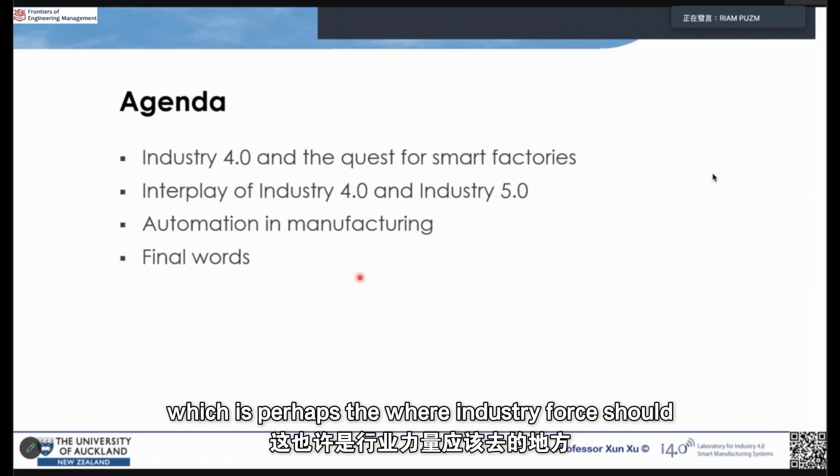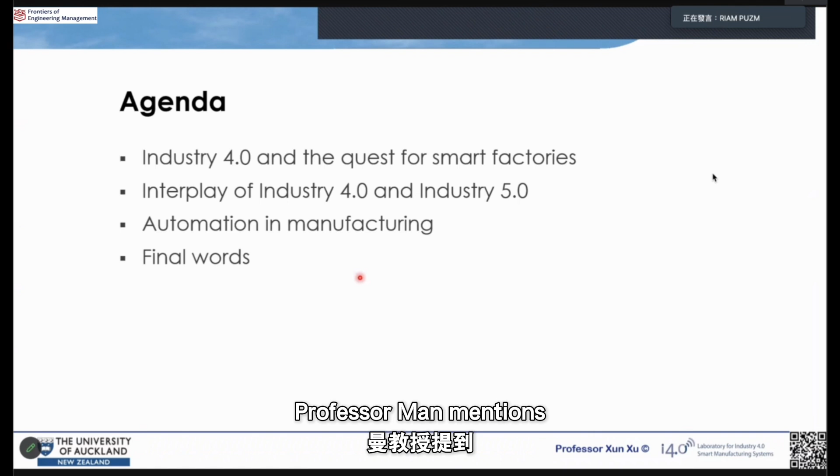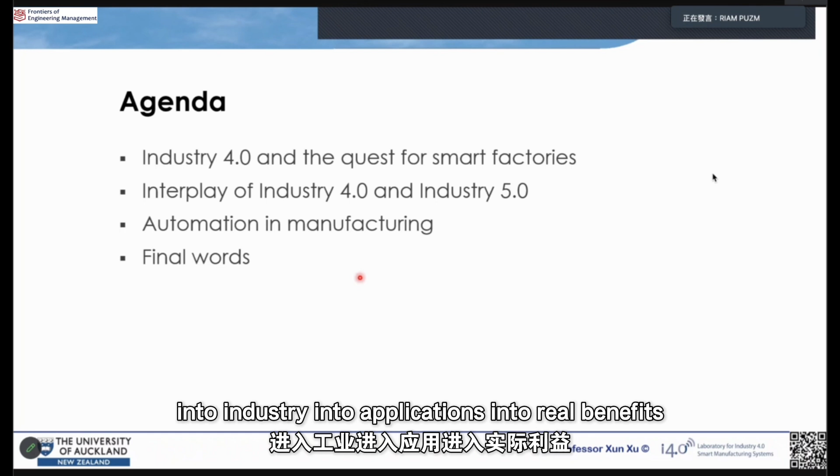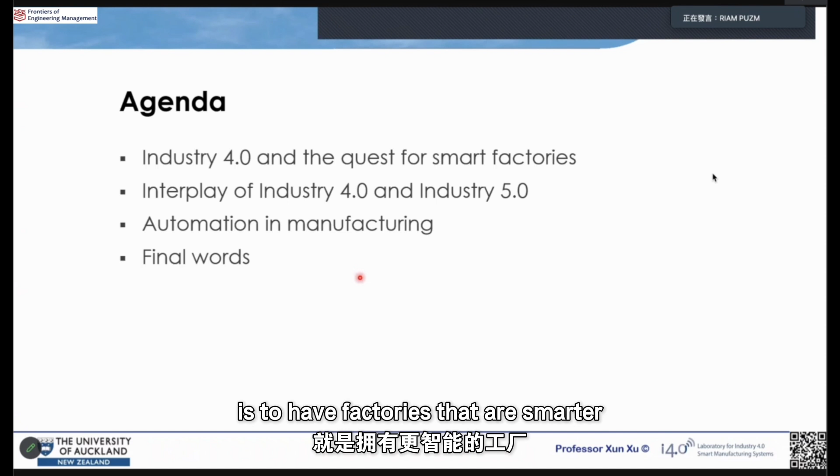So what I'll do is talk about Industry 4.0. I'm sure all of you are aware of this - it is perhaps a quest for smart factories, which is where Industry 4 should land or bring benefits and values to society in many ways. As Professor Mann mentions, when you do manufacturing research, you have to do it so it can be transformed into industry, into applications, into real benefits in industry. But how to do that? One of the things people think Industry 4 should see as an outcome of research is to have factories that are smarter.

I'll talk about Industry 4 and Industry 5, the interplay of these two industrial revolutions - a strange situation we're in right now, working on Industry 4 while we have Industry 5. So how do we position ourselves? I'll talk about that. Interplay is perhaps not the right word, but I couldn't find better words for it. We'll see how it goes.

And automation in manufacturing is the final topic, as you've seen in the title of my talk. Again, I don't mean automation in the conventional sense as in Industry 3.0, but automation in a broader sense - things that may operate and have autonomy without involving human beings in the processes. I'll finish off with a few final words.

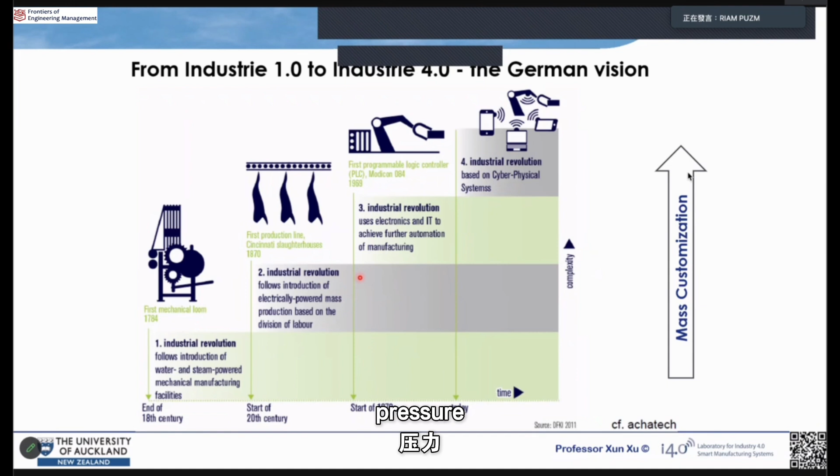Well, I guess the key thing is mass customization for manufacturers. The days are gone when you could produce cheaply the same products in tens of thousands of volumes and millions of parts - everything the same - to drive down the cost and make it affordable. But now things have changed, and people all want things to themselves - something that you have, but nobody else has. That puts a lot of pressure and creates a lot of challenges for manufacturers, who have to make sure they meet your requirements.

Their system, the factories will be able to produce a very small volume of products. One extreme is one-off and big varieties. And they have to have a quick turnaround, and even further, they have to make sure the cost doesn't go up too much. Otherwise, nobody will buy whatever you make. It's a huge challenge, and this requires factory to be smart.

That's why smart factory is perhaps one of the key outcomes of Industry 4.0, as we see the technologies bring value to industry. But what is a smart factory?

Industry 4.0 technologies will lead to smart factories. One of the things is really to achieve individualized consumer and product manufacturing purposes. And CPS is one of the key technologies. As you probably have seen, under Industry 4.0 CPS is highlighted as a key element.

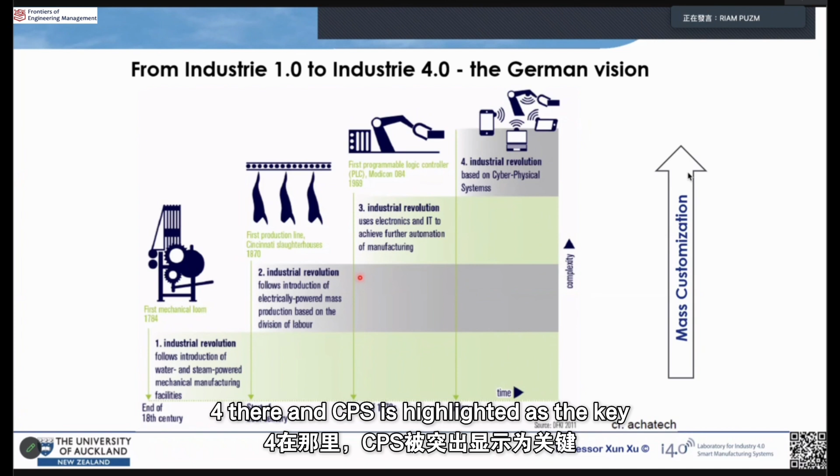The second thing is really you need to make manufacturing systems or factories broadly connected, so that you work as a coherent entity across the border, across different countries. And cloud manufacturing is one of the methods to make this happen.

Sustainability, we've all been talking about this, and it will only increase in terms of the work in this area. Service-oriented business practices - so manufacturing and services, usually they are sufficiently different, but now they converge. They share a lot of features and traits, and they will converge as we go in the years to come.

One of the technology shifts for smart factory is really looking at the components in the factory, how you actually control them. If you look at traditional factory, even if it is fully automated, things are normally centralized. So control is centralized, and the effort is to centralize things and integrate things, to coordinate things at a high level. But now we want to have a system that's flexible.

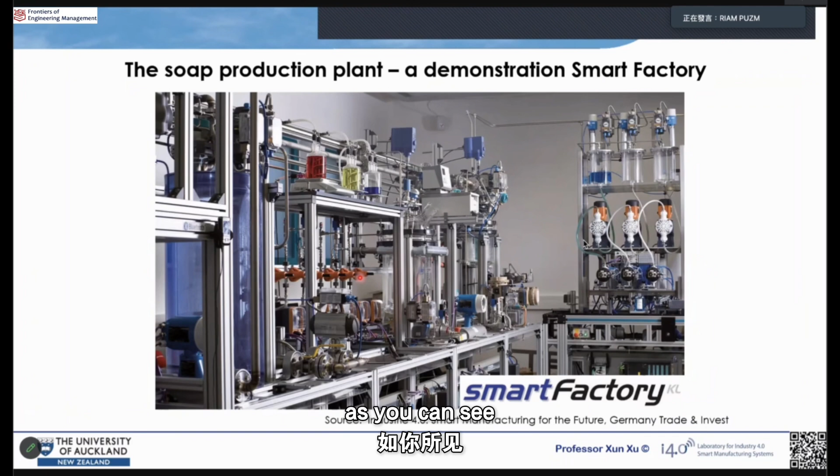When they're put together in whatever layout format, they know collectively what they can do. They require individual workstations to have the ability to connect, to communicate with other modules, and then collectively they can perform tasks, in a way they are set up in the layout.

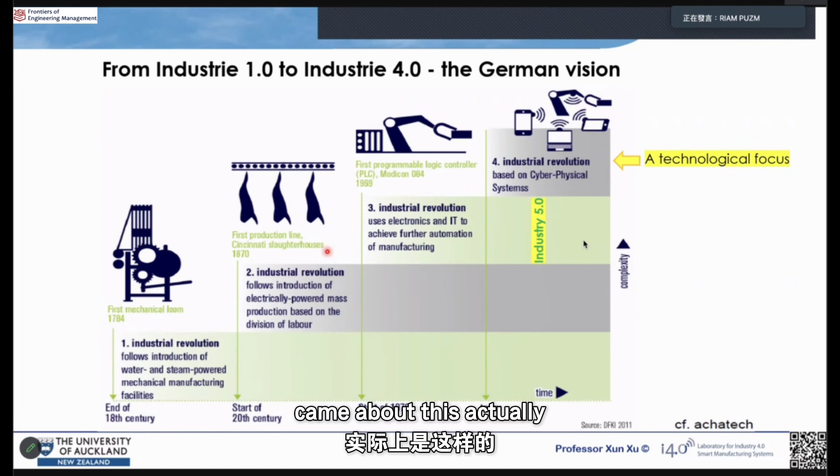And because of this, perhaps because of this - I'm pretty sure there are many other reasons - along comes Industry 5.0, sort of around 10 years after Industry 4.0 was introduced. So this is around 2021. Industry 4.0 was 2011, so about 10 years later, the idea, the concept of Industry 5.0 came about. This actually came from the European Commission. They announced funding proposals and themes around this topic.

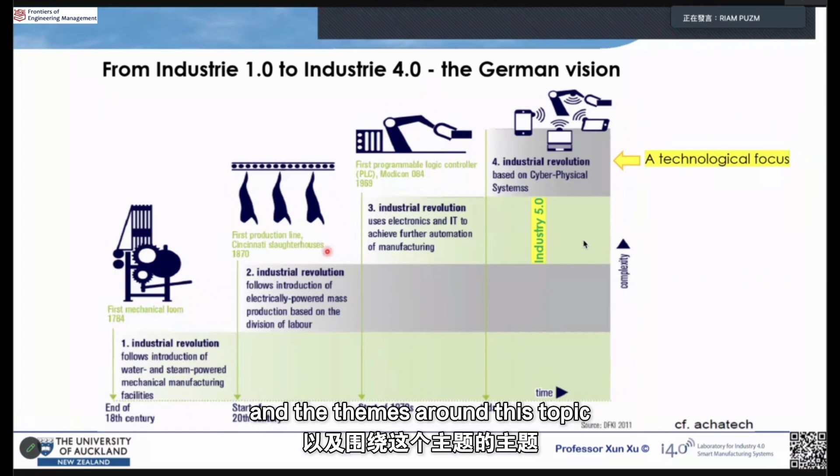And it's also around the same time we've seen the need for discussions and debates about two industrial revolutions happening. So we put together a paper - myself, Dr. Lu who is sitting here, Professor Lihui Wang, who you probably know, and Birgit Vogel-Heuser from Technical University of Munich.

Oh, right, that's right. Okay, thank you.

But I think what's important is what's covered in the paper. The paper is open access, so it's free - anybody can download and read it. And because of that, it has actually received a lot of attention. So what I've done is gone to the journal websites and tried to list the papers under different criteria.

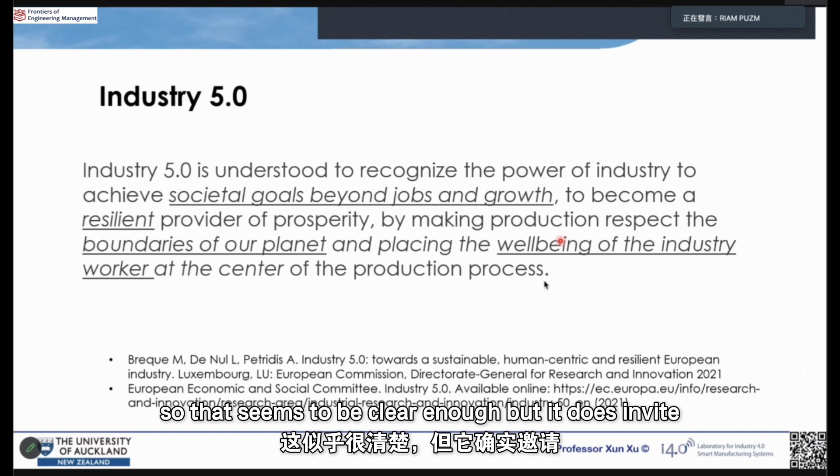I'll go through some of the questions as well. Before I do that - the paper highlights 3 pillars of Industry 5.0. There's a human-centric feature there, as I mentioned, which has got to be in the center. There's resilience and sustainability, respecting the boundaries of our planet. So that's Industry 5.0.

Now we have 2 industrial revolutions. Industry 4 is perceived as technology driven, and Industry 5 is perceived as value driven. But they coexist, and people may have questions - and people do have questions. We had questions as well as we were writing that paper. What are the questions? The questions were laid out at the beginning of the paper, and we have some discussions at the end. We attempted to provide answers to some of these questions, and I don't think the answers, by any stretch of imagination, are complete and final. So really it is a starting point for discussions - hence the workshop today. The workshop is a venue for sharing ideas, for debating topics, and looking into the future. A very fitting arena for us for this topic.

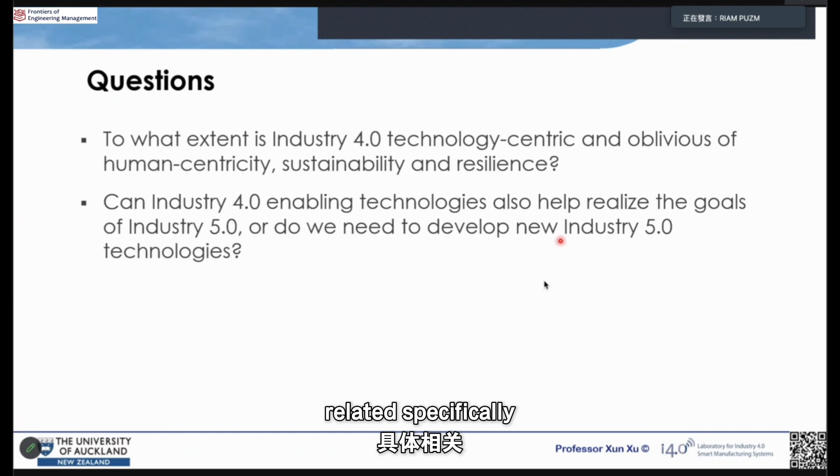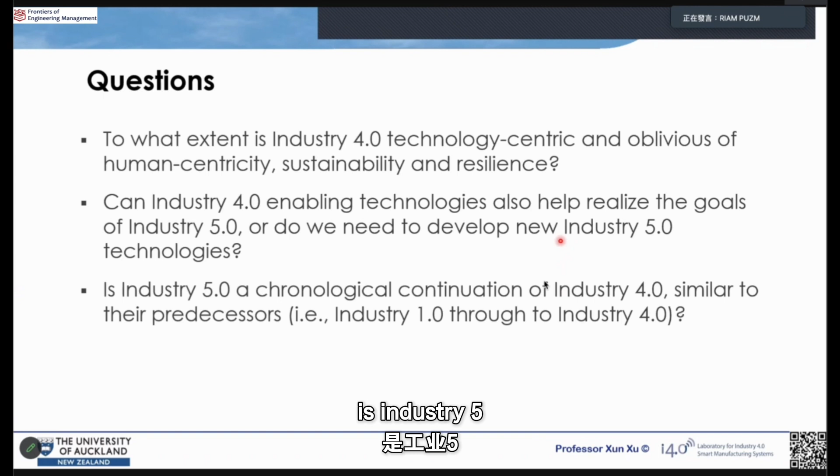Question number 3: is Industry 5.0 a chronological continuation of Industry 4, one after the other, just like the previous ones, Industry 1.0, 2.0, 3.0, and 4.0? Is Industry 5.0 similar to all the predecessors?

Question number 4: are we living amongst 2 industrial revolutions, or perhaps 1? It's only 10 years between these 2 terms being introduced. So I'll finish with this final question in my talk as well.

So very briefly, I'll just go through these questions and the attempts we've made to try to answer, respond to these questions. Question number 1: for Industry 4, yes, it does have a very clear technology slant. There's no question about that.

We've been talking about different technologies, CPS, digital twins, and IoT. But I think it is also fair to say it is not oblivious of human centricity, sustainability, and resilience, which means it does address that, it does mention that. If you look at the document published from Germany, it mentions these different aspects.

Perhaps not the central focus of Industry 4, but it does mention that, does cover that. Well, we seem to agree that Industry 5 is a shift in focus, from individual technologies to a systematic approach.

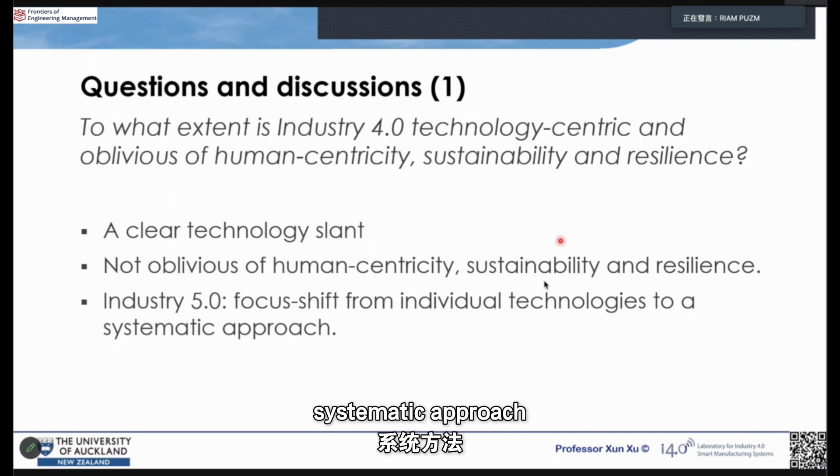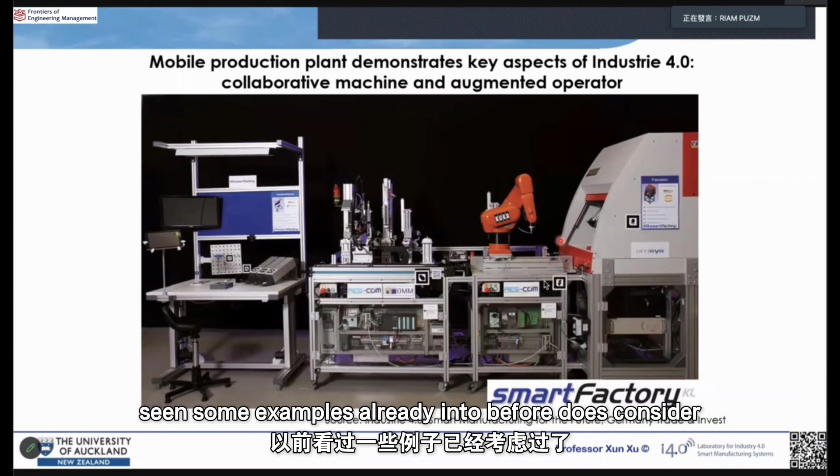So I think we've seen some examples already. Industry 4 does consider the human aspect. Okay, question number 2.

Technologies: Industry 4 technologies and Industry 5, do they actually have distinctive sets of technologies? Are they sufficiently different so that they can be differentiated among themselves?

But there are many ways of looking at it. You can have a look at the Industry 4 technologies. One of the lists people tend to quote is the 9 enabling technologies by Boston Consulting Group, though I don't have a slide for that. Some of you perhaps are aware of these 9 technologies. For Industry 5, the European Commission has identified 6 enabling technologies. But if you look at these lists and technologies, they actually have a lot of overlap, so they're not that different in many ways.

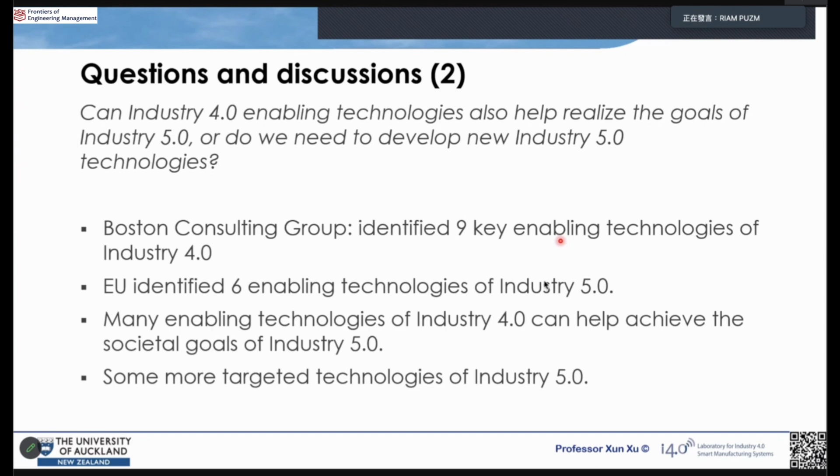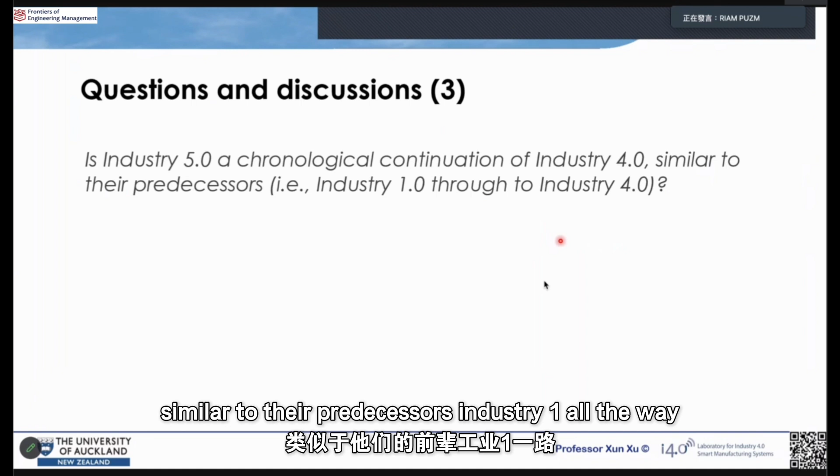Question number 3, perhaps one of the more obvious questions, easy to get an answer to: is Industry 5.0 a chronological continuation of Industry 4, similar to their predecessors, Industry 1 all the way to Industry 4? I guess the answer is no.

I don't think we have Industry 5 because we have realized Industry 4, so we move on to Industry 5. I don't think that's the situation. I don't think we can realize Industry 4 in a space of 10 years. I don't know how many years it will take to really transform the factory environment, to have all the technologies we've developed and you have been developing, seen on the factory floor.

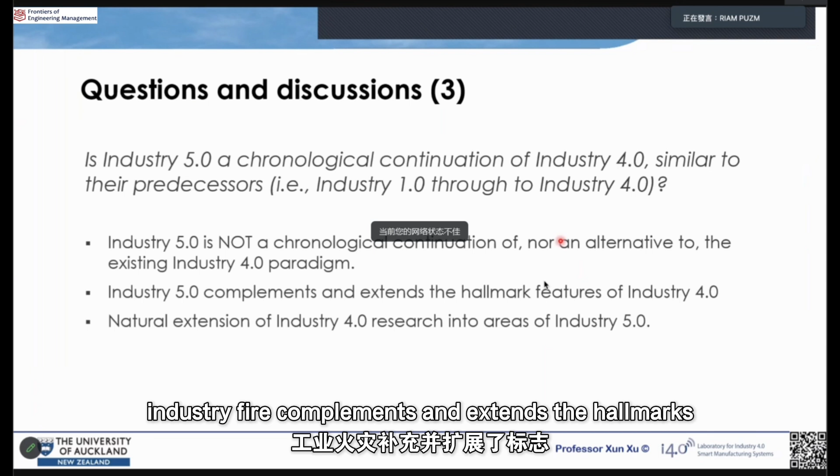Industry 5 complements and extends the hallmarks of Industry 4. I think that's true, so it's perhaps an extension of Industry 4, if you like, rather than yet another industrial revolution.

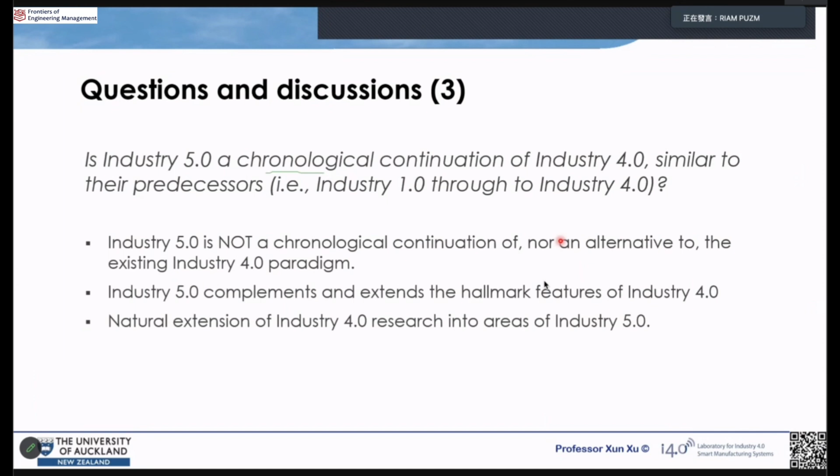Final question: are we living amongst two industrial revolutions, or effectively one? I call that a techno-social revolution. I like to think it's just one revolution. We started thinking about advanced technologies, and then we realized, look, we have to look after people in the factory.

We might have people in the factory for many, many years to come. How do we make a factory so that the workers and the machines come together, work together happily, and can be made very productive?

They form a coherent little society in a factory, so that's what I'm trying to put through to you. There's no point creating new terms like Industry 4, Industry 5. I read somewhere somebody proposed Industry 6.0, and others proposing Industry 4.5, Industry 5.5, whatever. But there's no point doing that. It might be useful to apply for funding using these new terms, but we're doing real research work, so I don't think that's the way we should go.

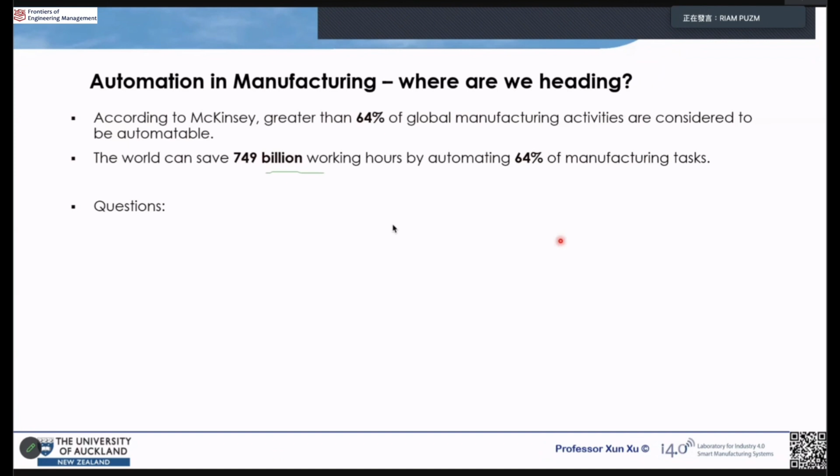But there are questions. Now we come back to my topic at the beginning, automate or not automate, okay? The first question is perhaps, will the trend of increased automation in industry continue in the future, until we have factories that run on their own, lights-out factories?

Just like cars we're driving these days, we'll have driverless cars in the future. I think that's coming, and we're going to see that. But factory, are we going to have people-less factories?

Suppose McKinsey does another study of this 20 years later, are we going to see different assessments again? Are we going to see maybe 85% of the jobs will be transformed, will be automated, or maybe 90%? Are we going to see that? This is a trend we need to ask ourselves, about the time that we may not be around, 50, 100 years later. Will we always see people in factories?

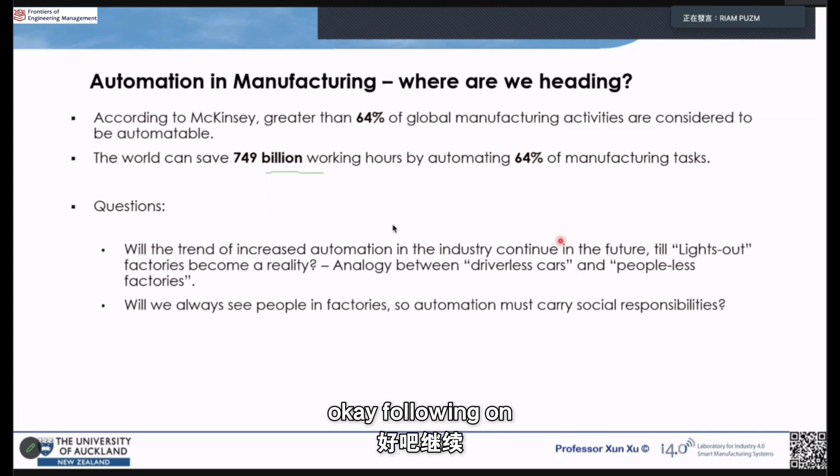Okay, following on to the first question, automation must carry societal responsibilities. If a factory has people, and they have to have people in the factory doing the tasks we need them to do, then the factory becomes a mixture of machines and people. It's like a little society, and how do we respect humans in the factory? I think that's one of the key reasons why we are talking about Industry 5.0.

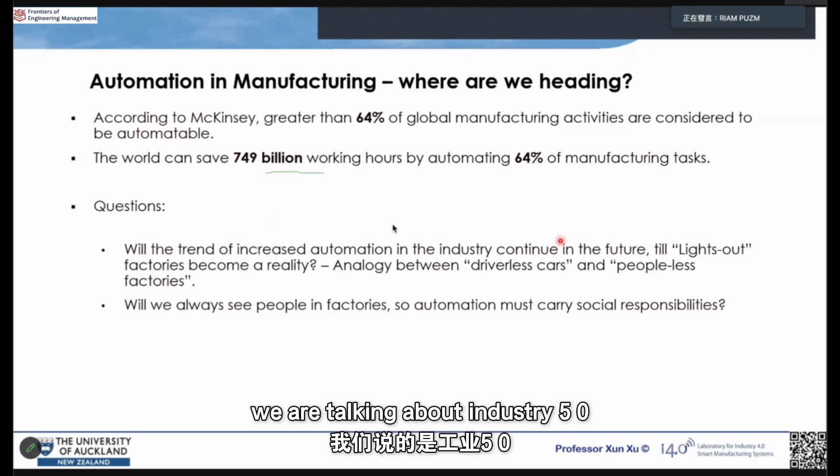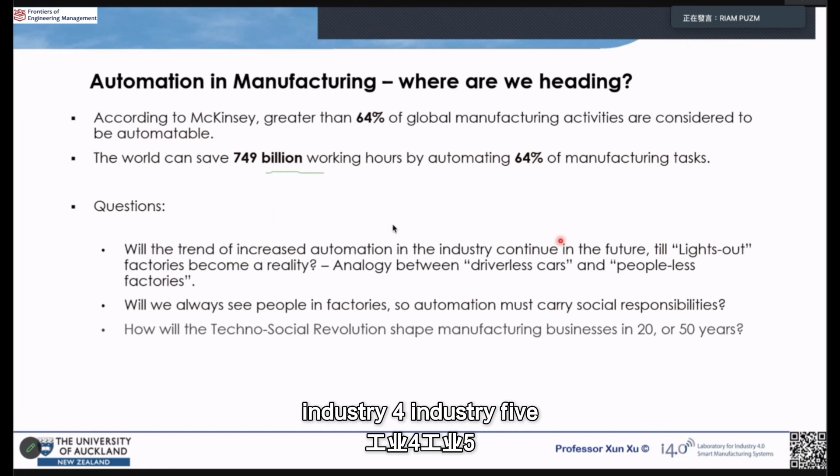That's the second question. Question number 3: how will the techno-social revolution shape manufacturing industry businesses in 20, 50 years' time? We talk about Industry 3, Industry 4, Industry 5. In 20, 30, 40, 50 years' time, how do we see that? Where does it go? Will manufacturing firms continue to exist as an economic entity or a social entity?

Factories, different manufacturers, over the years - one of the key drivers for a factory to exist, to continue to advance, to improve, is making profits. No question about that. You have to make things cheap enough that it can survive and be competitive.

But if we have people in a factory, do we need to consider them? If the answer is yes, to what extent do we consider that? So that's decisions we make, technologies we invest in, will benefit people in the factory, workers in the factory. You may compromise the revenue, the profit, but we may accept it because of this human-centric approach we're taking.

How does AI impact manufacturing automation? This is the time AI is blooming - the technologies, research on AI, in many years past, people didn't see much in mainstream application. Now is the time we see that. Like it or not, you see it, and we're jumping on that in different volumes and capacity.

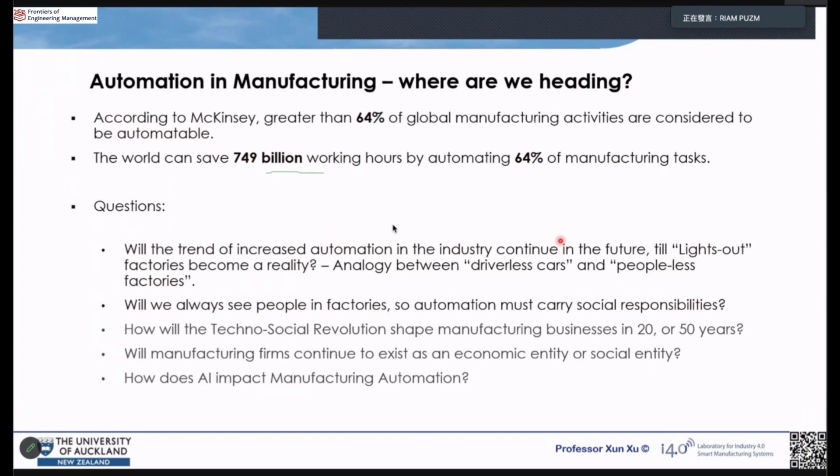But how does it impact manufacturing? Where do we see manufacturing go with the continuous influx of AI tools and open AI tools coming online? I want to come back to Industry 4, Industry 5, with human in the loop or not, and things that can be automated and things that cannot be automated.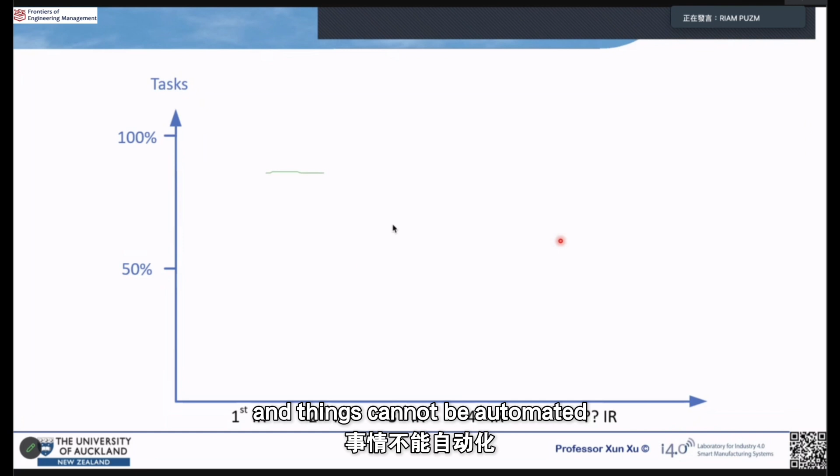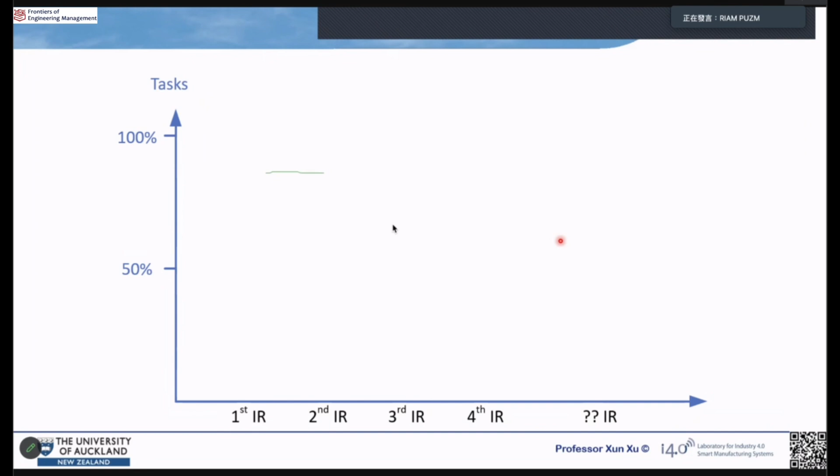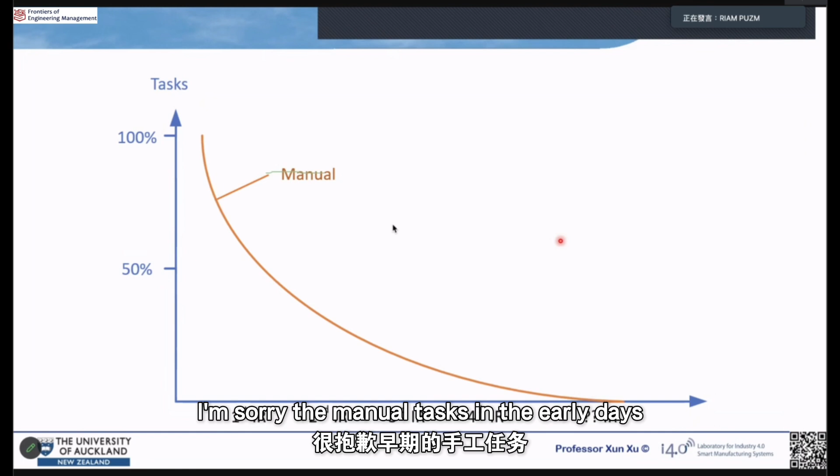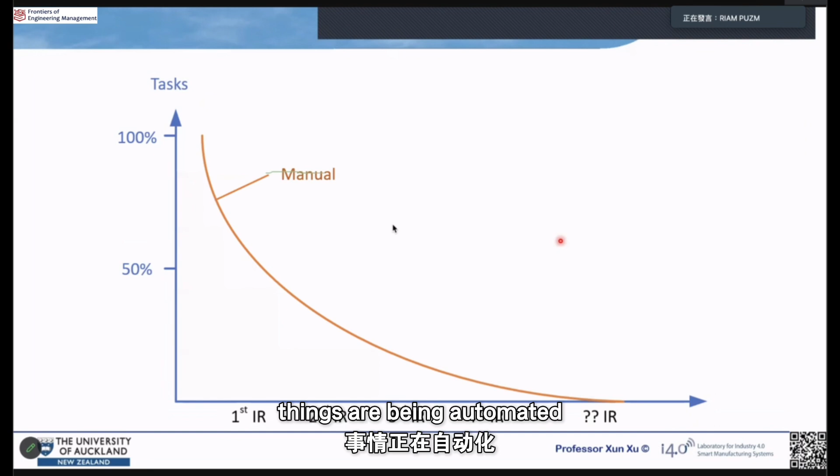So if you look at this chart, the vertical axis represents tasks in the factory, and I have industry revolutions on the horizontal axis. For Industry 4, perhaps the manual tasks in the early days, before the first industrial revolution, were all done by human hands. There were no machines. But over time, as we've had industrial revolutions up till now, things are being automated, so more and more jobs and tasks are automated. Hence the graph I've got there.

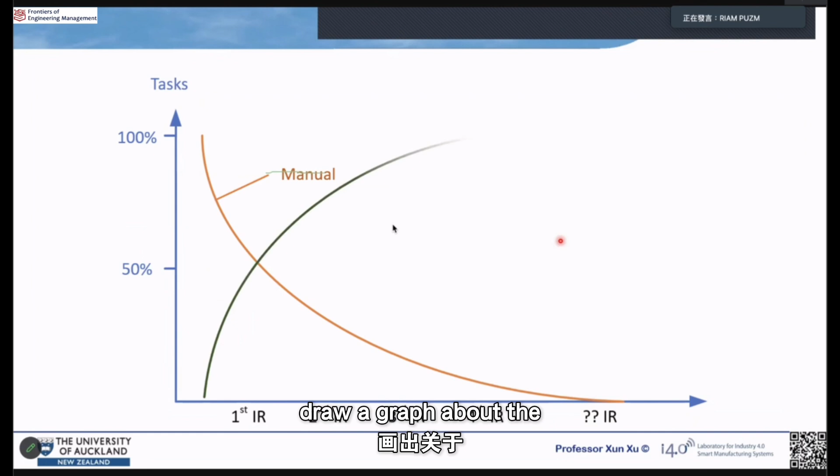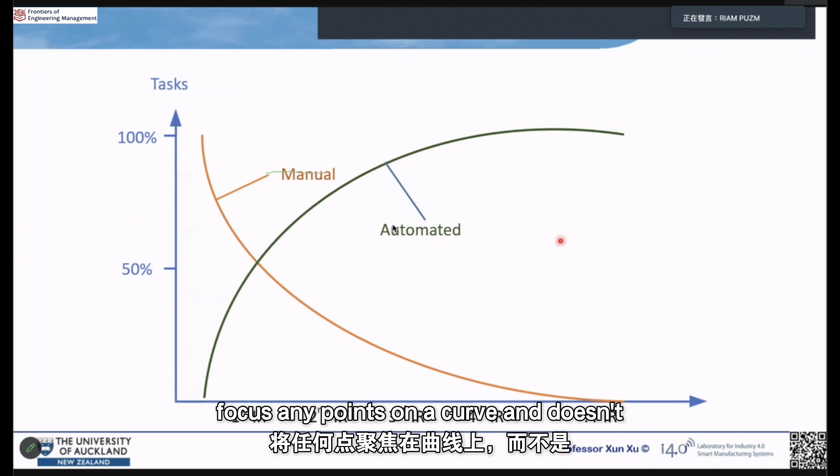But if you draw a graph about tasks done by machines, automated, it's just a mirror. This is a very indicative diagram, so don't try to focus on any points on the curve, it doesn't mean much. It's sort of a mirrored diagram, it's got to be mirrored, I think.

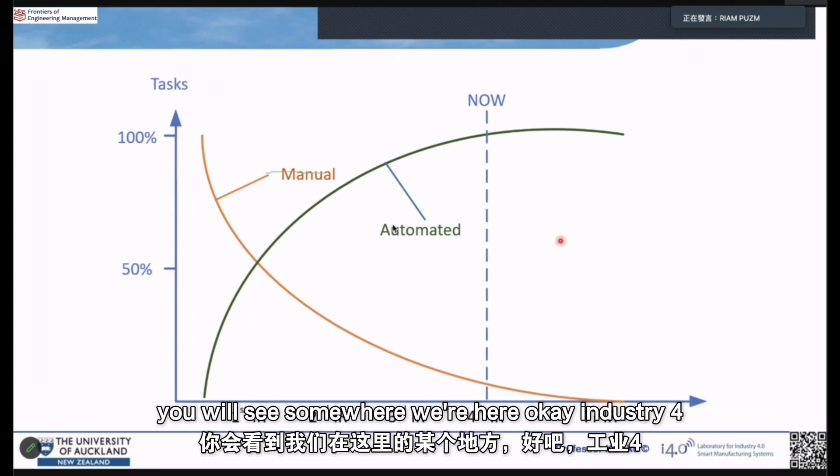So the tasks that are automated increase over time. Where are we at the moment? If you look at the factory, how many jobs are automated and how many are not? Probably we're somewhere here, at Industry 4, fourth industrial revolution.

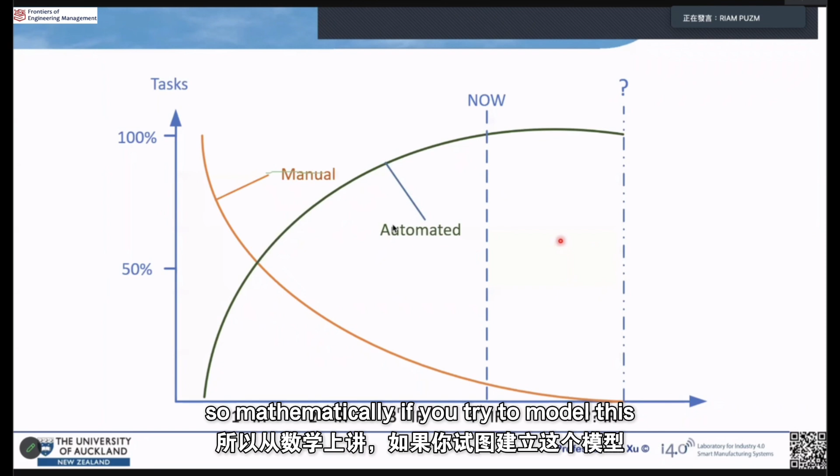But the question is, remember I was talking about the trends in the future. Will the trends of automation for manufacturing continue? It may slow down, but the trend still continues. It may take a long time to automate some of the tasks where we still have human beings involved. And will we ever see a day where factories actually run on their own, with no people in the factory? Mathematically, if you try to model this, you might have a point here, but this is perhaps, I don't know, could be next to infinite. Maybe we will not see that.

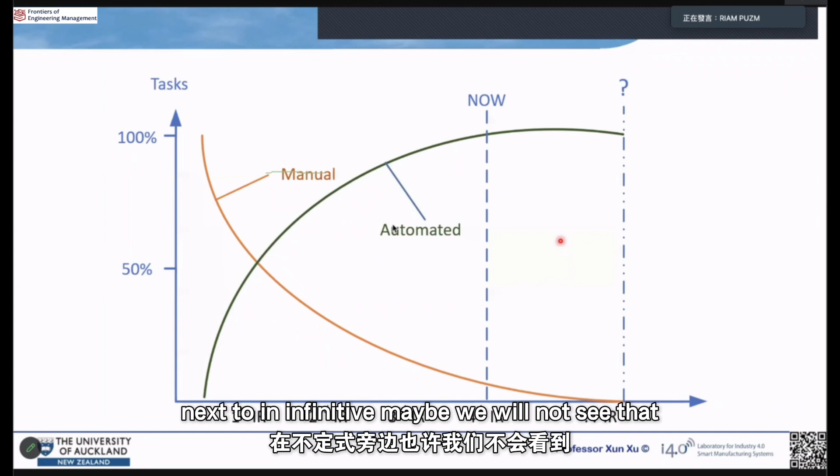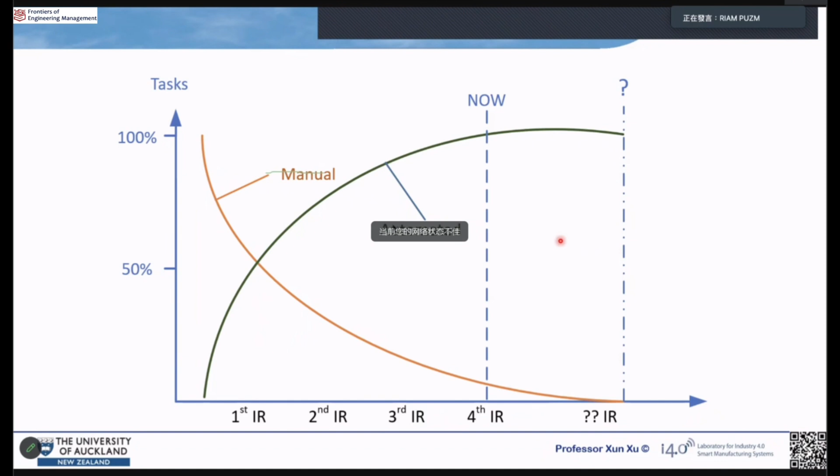But again, I'm asking questions. This is a question perhaps nobody can give you an answer to, so I wouldn't have the answer. I don't know, this industrial revolution, maybe there's a 10th industrial revolution we'll see, or something like that.

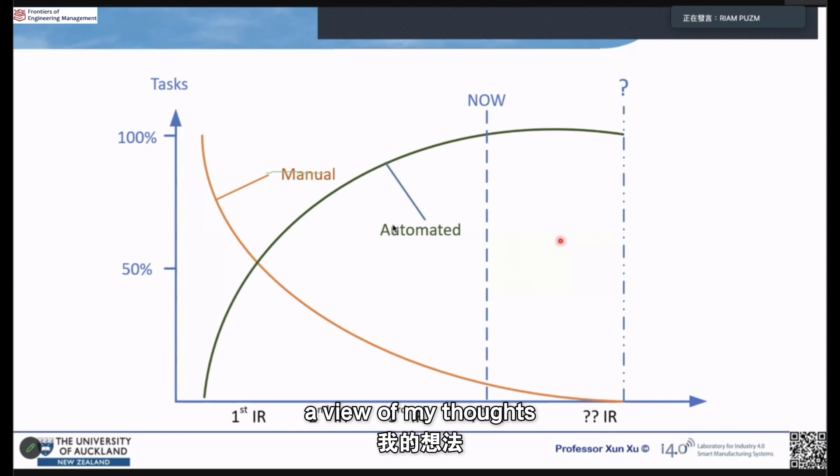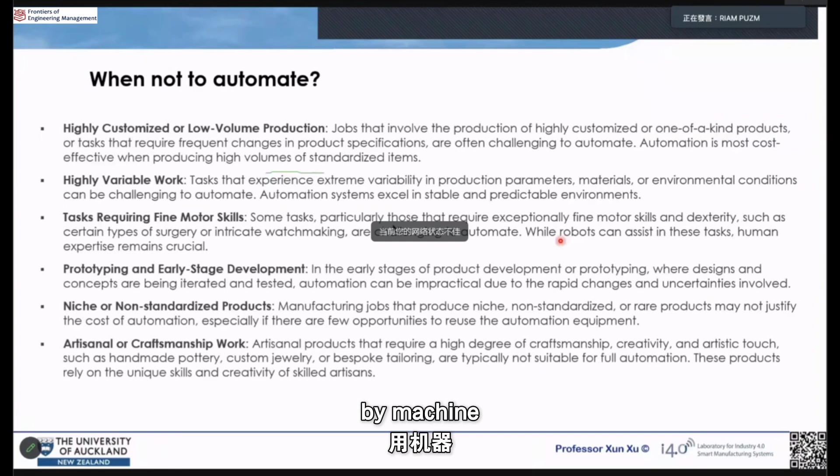So that's a graphical view of my thoughts on what to automate and what not to automate. In a factory environment, managers will have to make decisions, and the decisions are based on some criteria here - things need to be automated and things not to be automated. These are some of the tasks. Right now, people think it's better not to be done by machine - let's keep people there doing all those tasks. I won't go into the list, but they're all very self-explanatory.

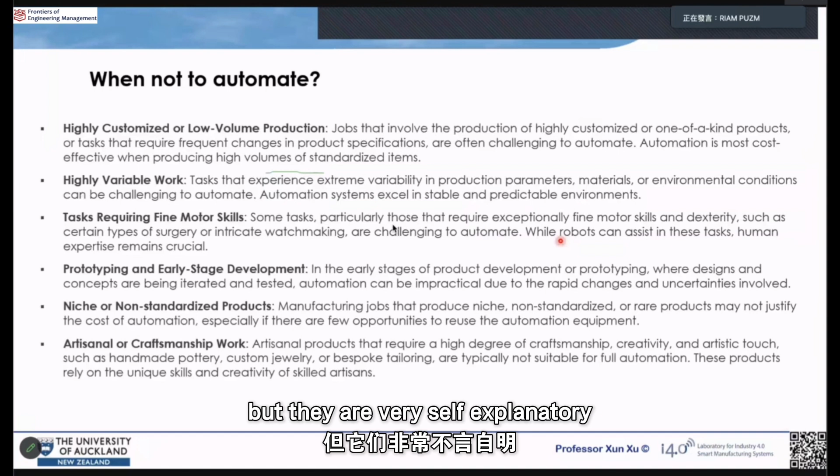I didn't mention AI for manufacturing. Well, that's coming, like it or not, it's coming. It's really in front of your eyes, and you see that day in and day out. Deloitte did a survey, and 93% of companies believe that AI will have a pivotal role to play in technology shift, growth, and innovation.

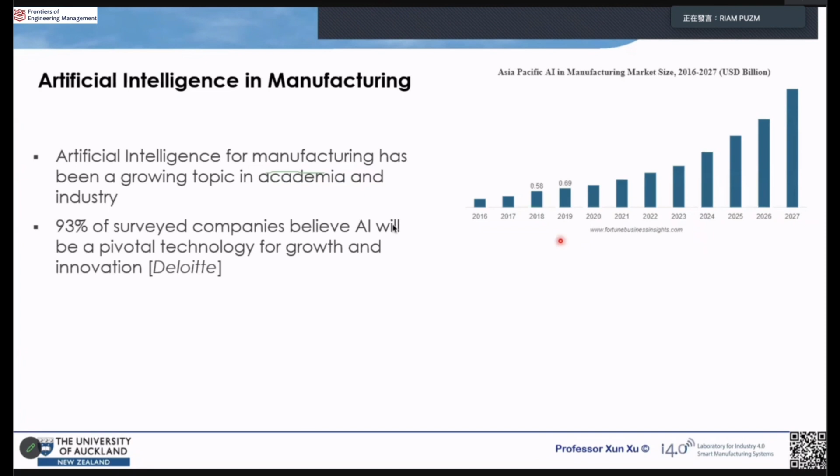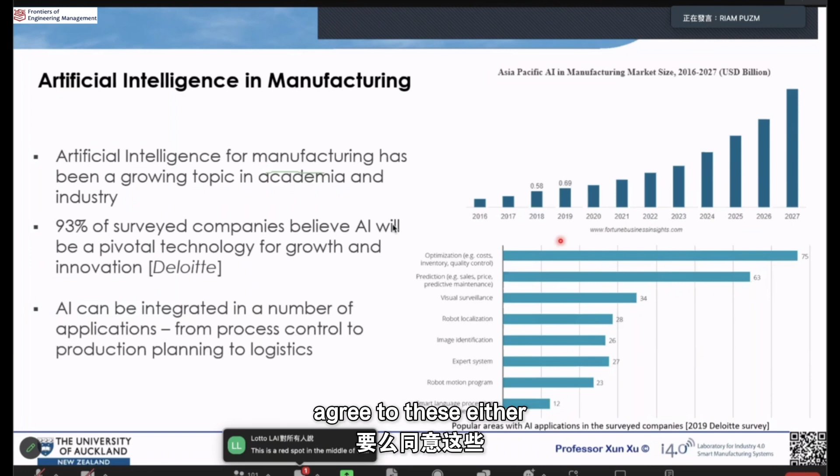So it is a general understanding, not difficult to agree to these either. Well, human-centric, human-robot collaboration - you've seen this in many places. An example from the Volkswagen factory in Germany, where a robot is working with humans doing assembly work and other tasks. So really, you can see the slogan here is: no knowledge left behind.

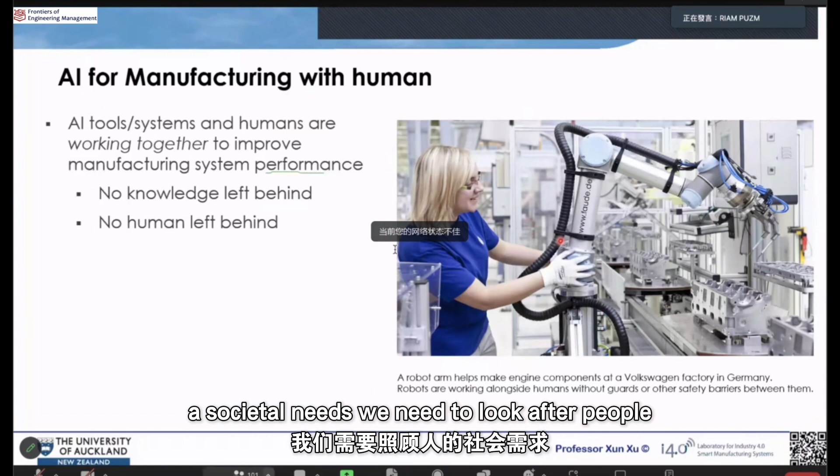So it's knowledge possessed by human workers and operators, and we want to preserve them, we want to make use of them. So knowledge is power, it creates value as well. No human left behind - that's really a societal need. We need to look after people, we need to take factory workers along with technology advancements.

Creating manufacturing systems with enhanced personalized production is one of the drivers of Industry 4. But really, if you want to make a system flexible and robust, and if you have a human in the system, then you need AI tools to give you the power and ability to make that happen, making manufacturing systems adaptable to system disturbance as well.

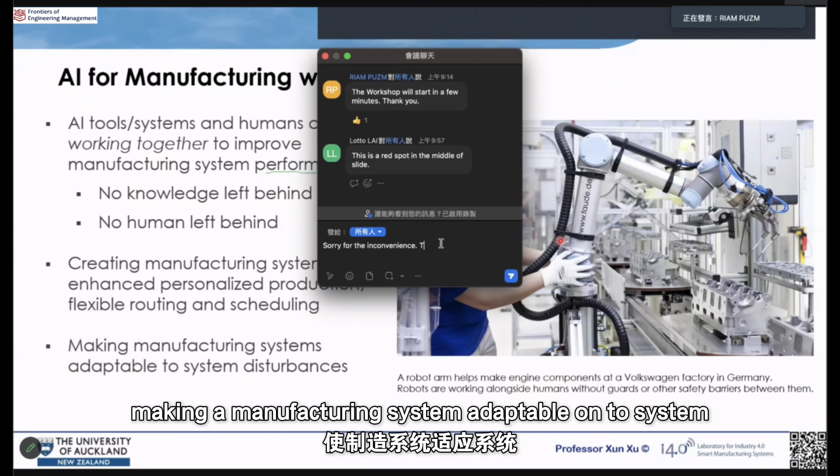So another question: what is a factory for? Why do we need a factory these days? It might seem a simple question, but perhaps you'll realize it's not when you consider two scenarios. One is a fully automated factory with no workers, and the other has humans in the system working with machines. So the question is: is a factory for economic benefits, or for social benefits? You might want to redefine benefits, but really it comes down to one without humans, one with humans. So how do you really treat the factory as a unit?

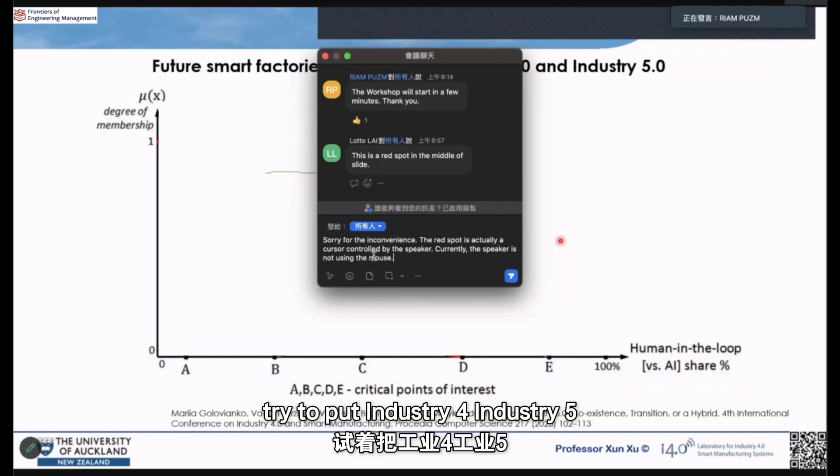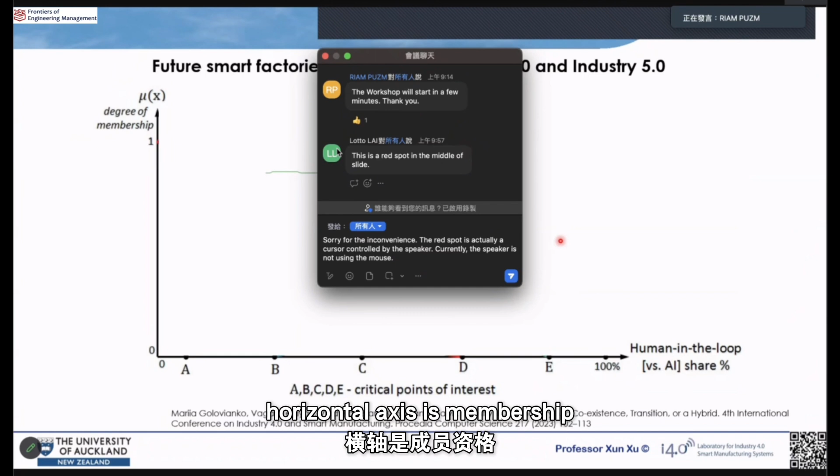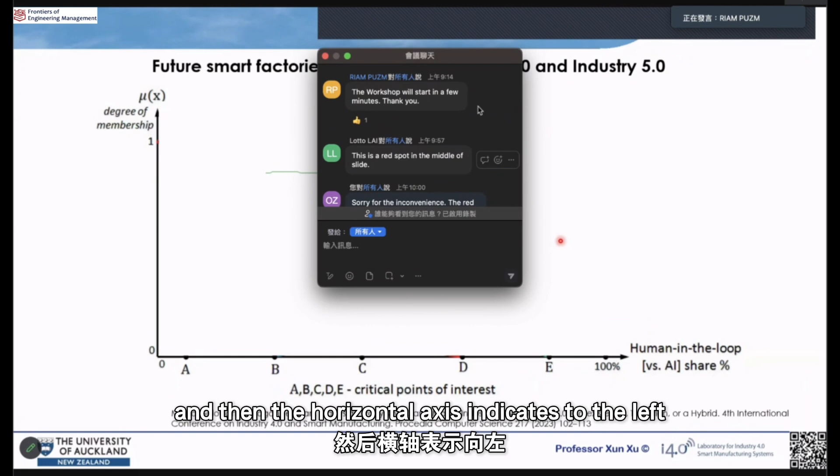As I was thinking about this, I came across a paper published last year from this conference, in Procedia Computer Science. It tried to put Industry 4 and Industry 5 in a diagram. I'm quoting this diagram from the paper. The vertical axis is membership, based on fuzzy logic - to what extent something belongs to a certain class. To the left is everything fully automated, and to the right extreme is everything done by human workers.

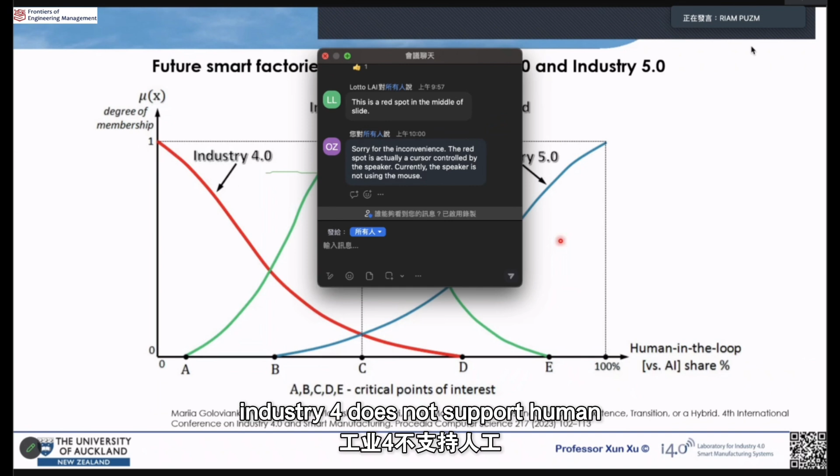The red line indicates Industry 4, so to the left is everything automated. At point D, this is where Industry 4 does not support human-in-the-loop, a human-centric approach. The blue line indicates Industry 5 - one extreme is 100%, where membership goes to 100% people if you go further right. So when you have both industrial revolutions, Industry 4 and 5, a hybrid situation, you get this green bell curve in the middle.

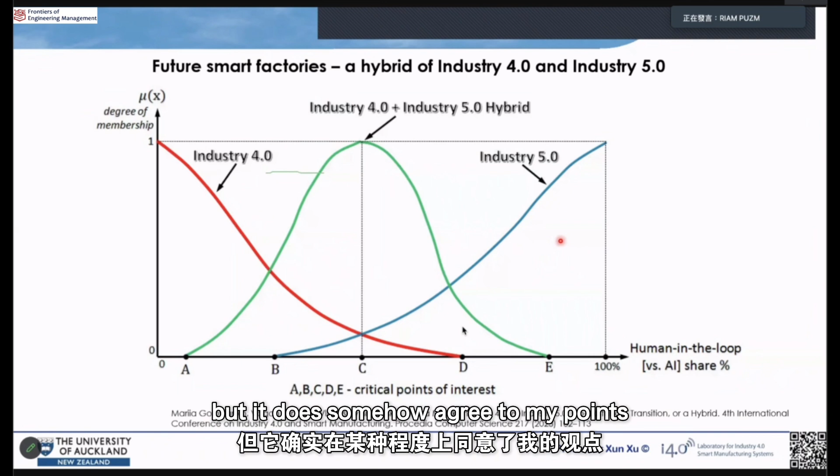This is perceived as where we are at the moment. But the paper falls short of calling this a single industrial revolution, as I like to think it is. It does somehow agree with my points though - we don't have two industrial revolutions, we only have one, where the focus has shifted somewhat.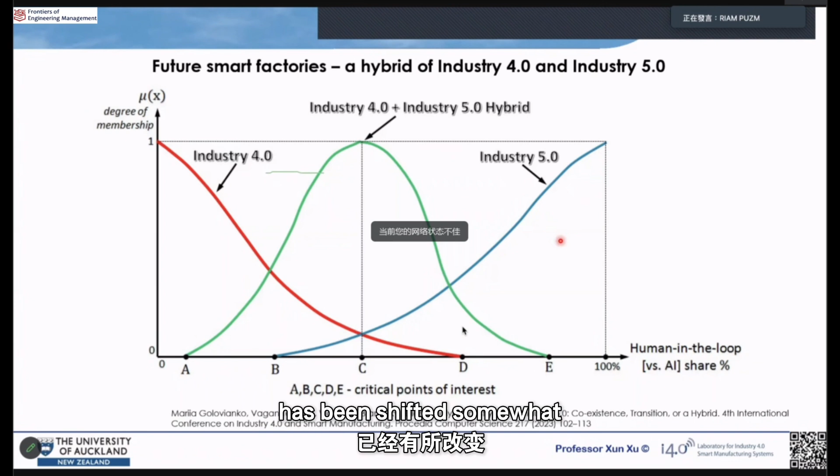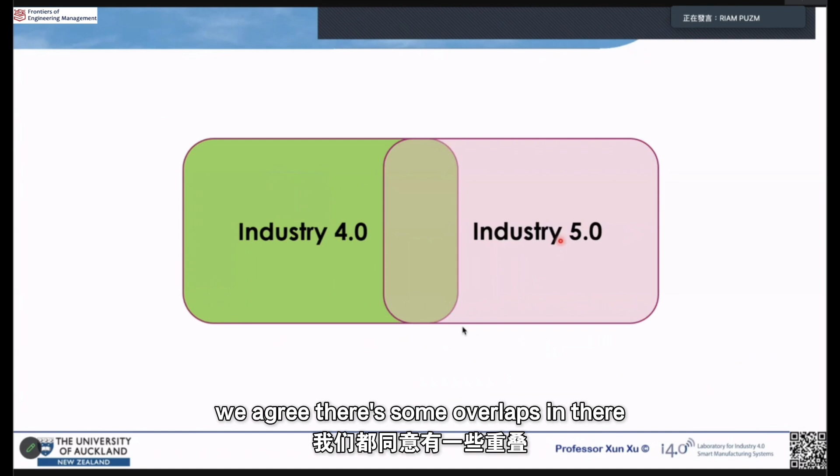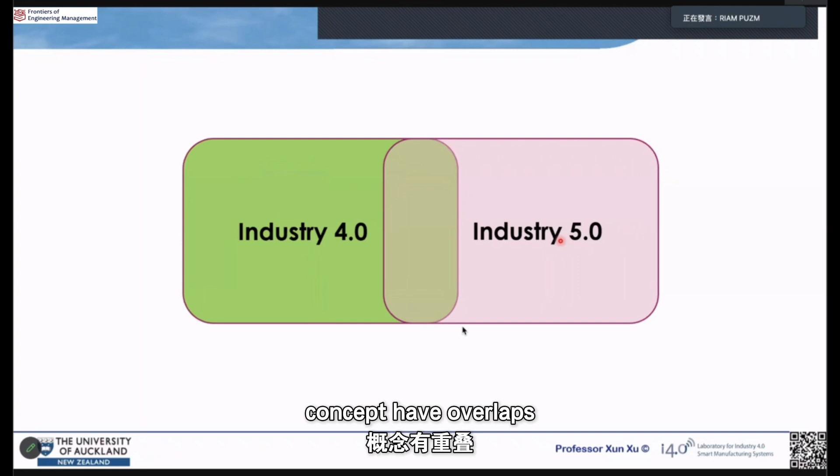Okay, here's another diagram - my own. If Industry 4 is what we think it is, and Industry 5 is what I think it is, we agree there are some overlaps. The overlap space doesn't really indicate the percentage of overlap, but I'm saying these two concepts overlap. Really, they have to be seen as one thing. That's why I come back to one term: techno-social revolution. Maybe there's another paper in the making to talk about this further - so we'll see, watch this space.

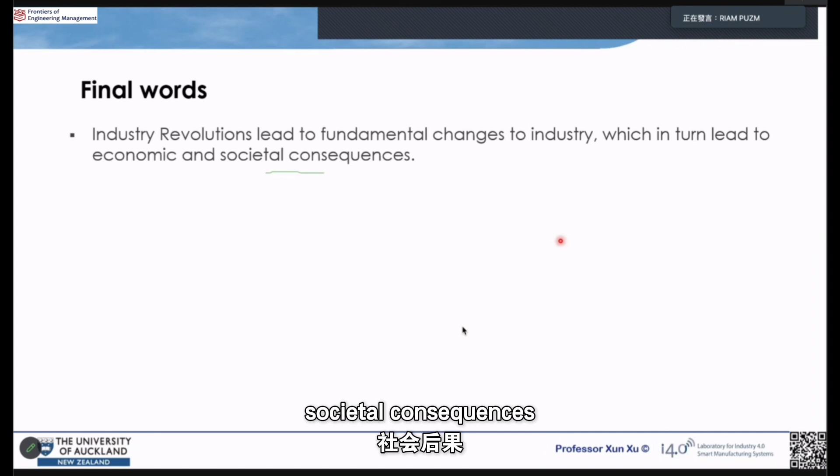To finish off, a few concluding remarks. Industry revolutions from 1 to 5, I think we all agree, have led to fundamental changes to industry, which in turn lead to changes in economic and societal consequences. It's very important to emphasize societal consequences, which weren't really there from Industry 1 all the way to Industry 3, I think.

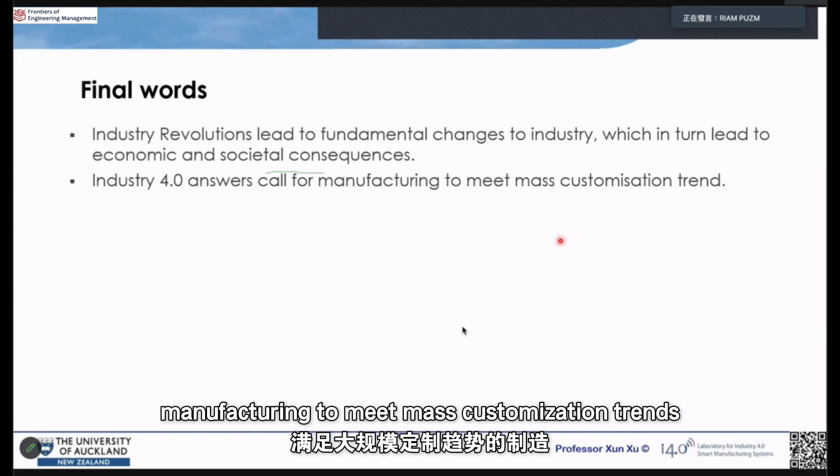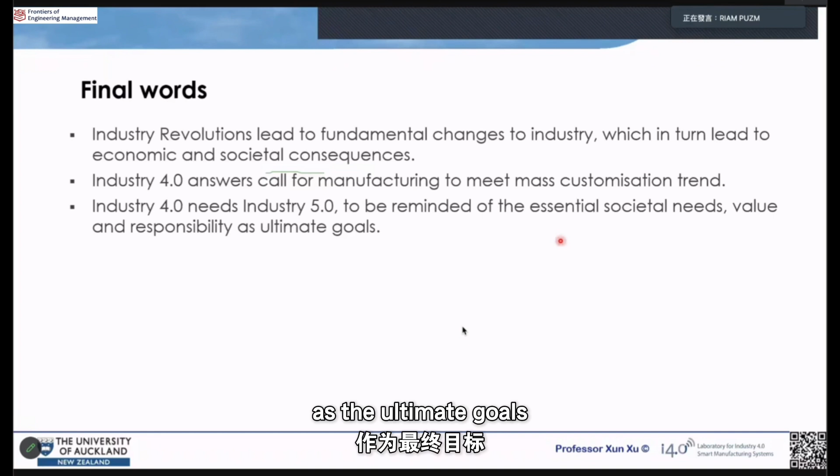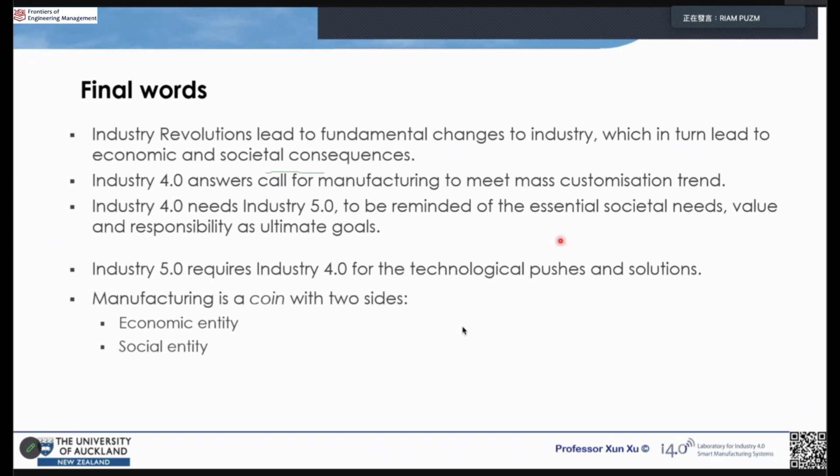Industry 4 answers the call for manufacturing to meet mass customization trends, as one of the drivers for Industry 4, as I explained at the beginning of my talk. Industry 4 needs Industry 5 to be reminded of essential societal needs - I think that's clearly true. Reminded, or perhaps with more emphasis on societal needs, value, and responsibility as the ultimate goals. Industry 5 requires Industry 4 for the technological pushes and solutions, so Industry 5 itself will need Industry 4 alongside it providing those technology pushes and solutions.

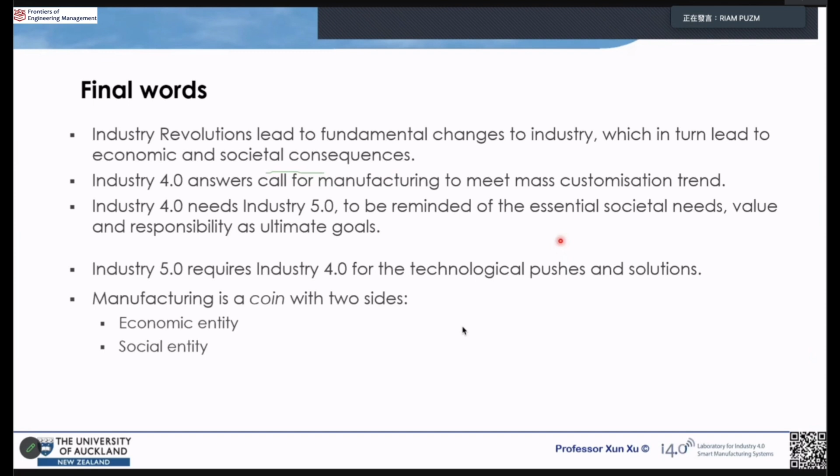Manufacturing can be seen as a coin with two sides - I've explained this already. One side is the economic entity, the factory itself, and the other side is the social entity, meaning there are a lot of human aspects and well-being to be considered in the factory. So that's my talk, and thank you for your attention.